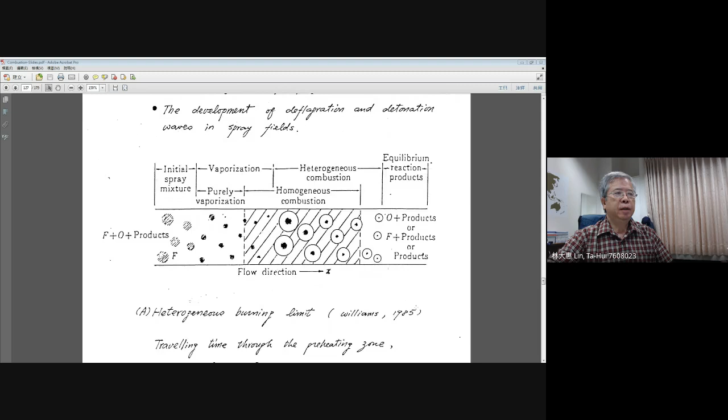Let's look at the modeling on spray premixed flames introduced by Williams in 1985 in the book of F. Williams. And as I described earlier, we consider the spray flame structures like the plot shown in the page of 3.34. Here, they describe the premixture of gasified oxygen and fuel vapor with the fuel droplets.

In these mixtures, actually, they assume the oxidizer is easier to be evaporated as a gas, right? Therefore, from the beginning, they assume oxygen is already provided because of the easier gasification from the injector and also the gasification process in the upstream sites. And that means that we just look at the influence coming from the liquid droplets, okay?

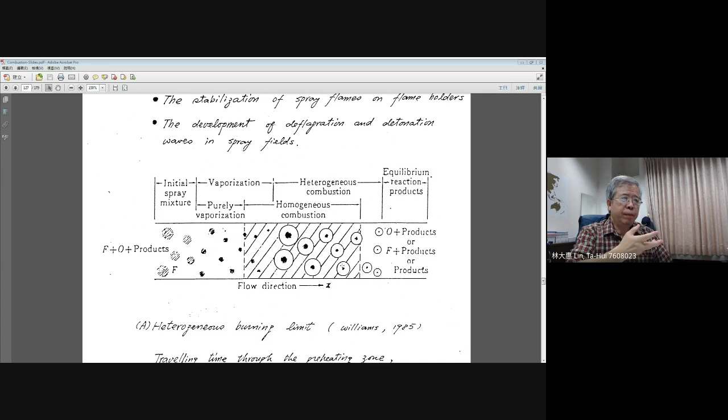This mixture contains the gaseous oxygen and some fuel vapor evaporated earlier in the beginning and also has some liquid droplets, okay? Now, as I described, when this two-phase mixture flows continuously from the left-hand side to the right-hand side, and since we already have some fuel vapor mixed with oxygen, that means that in the gas phase, actually, you already have some mixing of fuel vapor and oxygen.

That will give you a possibility to generate a bulk premixed flame. Actually, this is controlled by the gas phase of oxygen and fuel vapor. Okay, and here you can see that there's a region to let you know there is homogeneous combustion. It's just like a flame sheet of your premixed flame.

Okay, now in the premixture, you still have a certain amount of liquid fuel, right? And that liquid fuel initially in the upstream side, maybe the temperature is not high enough, because you see the temperature profile of the premixed flame in the upstream side. Actually, the temperature is quite low, but when the flow moves closer to the premixed flame front, then the temperature will be increased, which means they will go to the preheating zone.

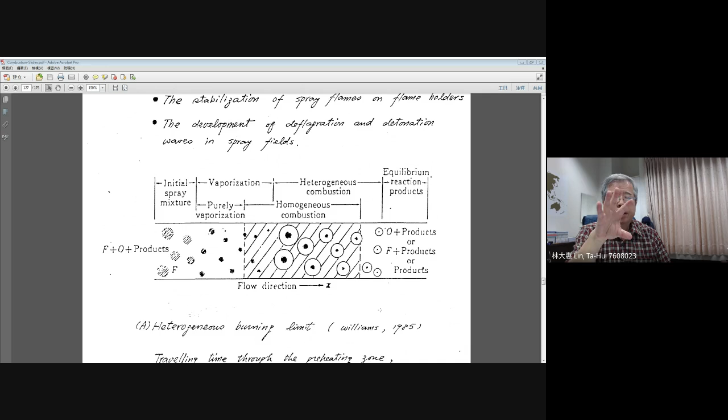Then when the flow flows into the bulk premixed flame, actually they do not have a chance to have a liquid drop, right? But if you have a large droplet, then the droplet lifetime is longer. Then you may have the droplet itself as a liquid inside of the premixed flame. Then you may have so-called heterogeneous burning, because in the gaseous flame, you will have tiny droplet burning inside of the reaction zone.

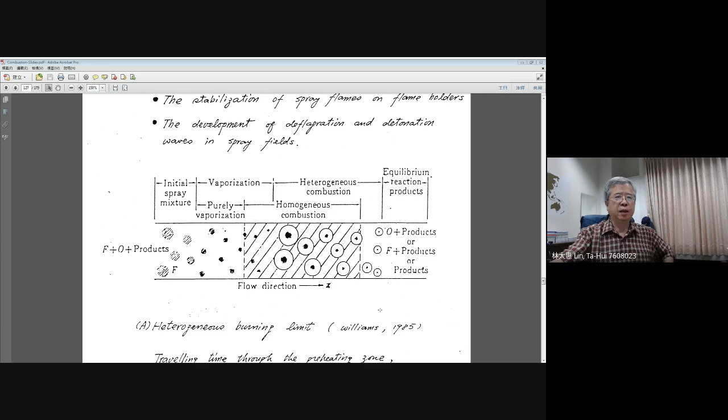Okay. Now the criterion to distinguish between homogeneous burning and heterogeneous burning depends on the traveling of your droplets in the preheating zone. In this traveling process, the droplet can complete evaporation or not. Okay. Now let's look at the two time scales.

The first time scale is the traveling time through the preheating zone, which means how long the droplet will move from the edge of the preheating zone to the premixed flame. Then this traveling time is very important to be compared with how much time this droplet needs to complete evaporation. Okay, then this is the droplet evaporation time.

Okay, now in Williams' book they simply give you some estimation to compare these two time scales. The first time scale, the traveling time through the preheating zone, can be determined by the preheating thickness, the length, divided by the speed, right? Because the flow coming from the upstream side is moving with constant velocity.

That means, as you remember from the previous learning on premixed flames, if you go away from the preheating zone, actually the flame speed is almost the same as the upstream side. We assume the velocity did not change too much. Then you can use your flame speed to be compared with the length.

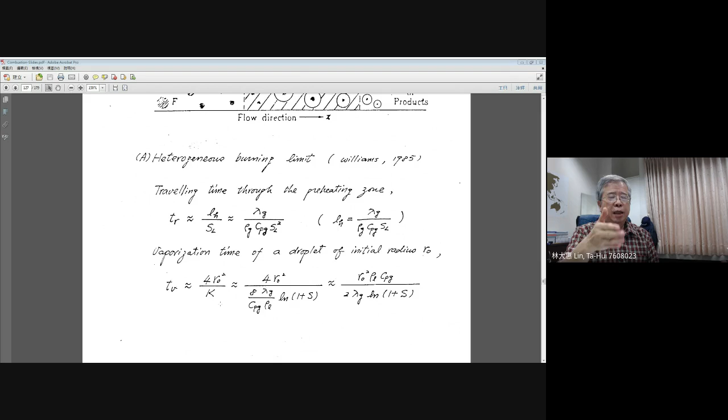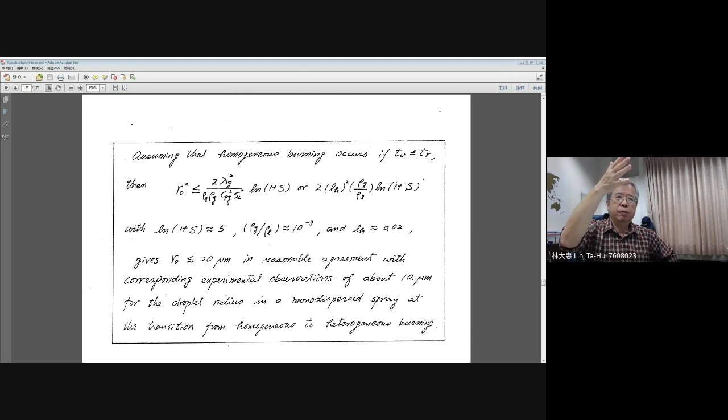Okay, then the criterion simply states that if TV is smaller or equal to TR, then you will assume there is only homogeneous burning, because droplets will complete their evaporation before the premixed flame front. Okay, and put these two equations together, and the threshold for the droplet radius for homogeneous burning will be described by this formula, and you can estimate for the regular hydrocarbon droplets.

Then you will find out the initial droplet smaller or equal to 20 micron is a reasonable threshold for the homogeneous burning of these two-phase mixtures. Use this formula to estimate: if the droplet size is small enough, smaller than 20 micron, then you will assume the burning only has gaseous burning without any droplet existing in the premixed flame region, the chemical reaction region.

Okay, and this estimation is reasonable, agreeing with the corresponding experimental observation of about 10 micron. From the experiment, for droplet size less than 10 micron, you always have complete gasification of the liquid droplet before the premixed flame. Okay, and this is a good estimation for distinguishing between homogeneous and heterogeneous burning.

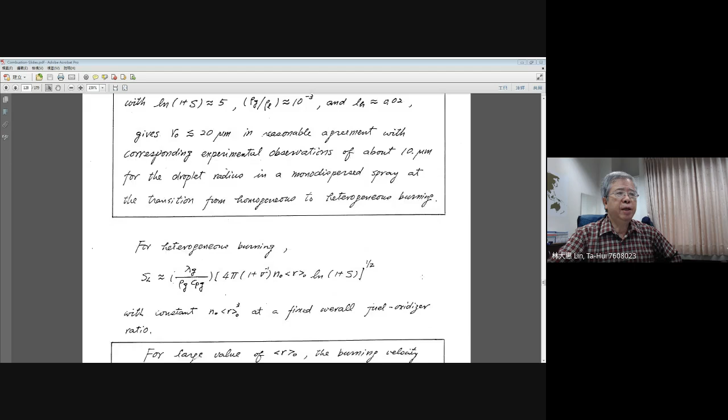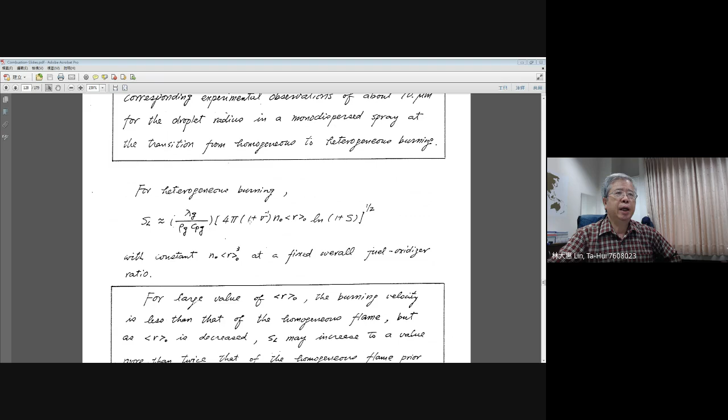Okay, and actually they try to estimate the flame speed for heterogeneous burning, to be compared with the flame speed for homogeneous burning we already described in the section on premixed burning. Then you can figure out there is a dependence on droplet number and droplet radius, N naught and R naught. N naught represents the number of droplets from the beginning; the subscript naught represents the initial condition. And R naught represents the average radius of droplets from the beginning.

Okay. Now, from these equations, we can further discuss, because from the beginning for this two-phase flow, we already control the total liquid amount to be the same, right? It's a fixed overall fuel-oxidizer ratio. That means the amount of fuel is fixed. That means the number times the volume of your droplets will be fixed. This represents the total mass of liquid fixed from the beginning.

If this is a constant, then N naught times R naught will equal 1 divided by R naught square, right? And you will find out this can be replaced by 1 divided by R naught square. R naught square can have a square root. Then you will figure out from the bracket the relation between the flame speed and R naught by inverse proportion. That means the flame speed is inversely proportional to the initial radius of your droplet.

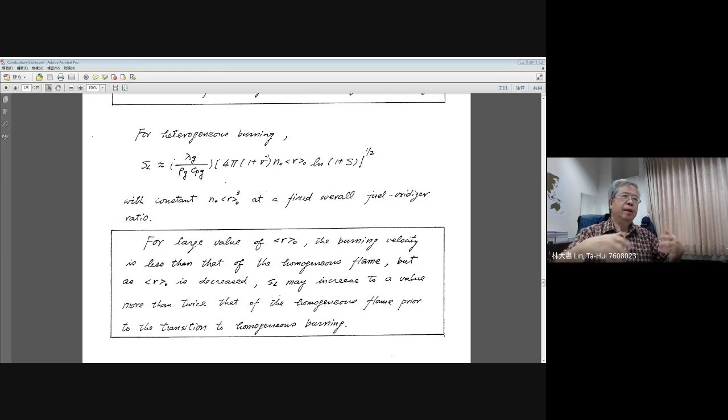And this needs to be justified by further formulation, because this relation does not give you the limit for the flame speed for heterogeneous burning. Think about it. I just explained the flame speed is inversely proportional to the initial radius of the droplet, right? But this relationship tells you if you reduce the initial droplet radius as small as possible, your flame speed may go to infinity. This relation does not give you the exact relation. It just approximately estimates this kind of behavior.

The justification needs to be analyzed based on a detailed study. And a detailed study of this idea was proposed in my master thesis, and the asymptotic analysis was published by myself and Professor Law, my advisor, in 1988. We tried to look at the structures like that. We consider two kinds of burning.

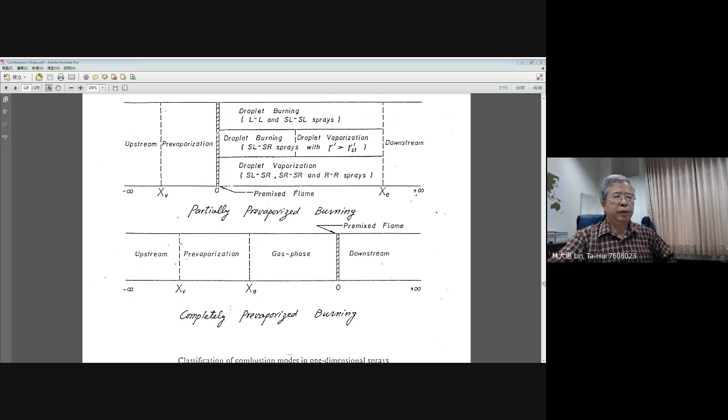The lowest one in this figure is the complete pre-vaporized burning. This mechanism represents all the droplets completely evaporating before they reach the premixed flame. From the upstream side, there is a two-phase flow, as we described earlier: some gaseous oxygen and fuel vapor, and also a certain amount of droplets. They may start pre-vaporization at x equals xv because the temperature reaches the boiling point of the droplet.

And they may finish pre-vaporization before they reach the premixed flame, which means at xe all the droplets finish gasification and disappear. In this region, the fuel and the oxygen are purely gas phase, and this premixed flame can be described by the gaseous premixed flame we already discussed earlier.

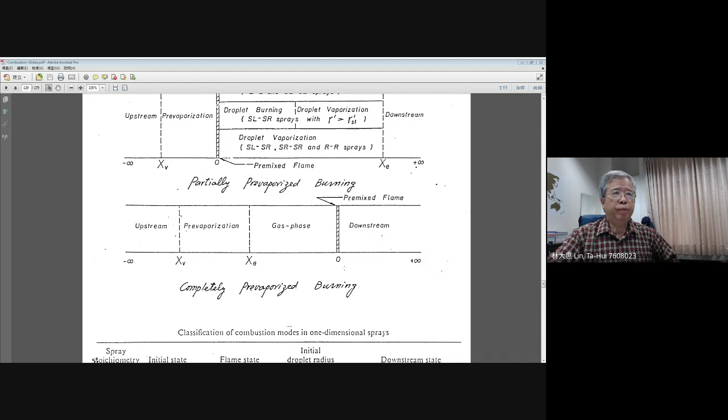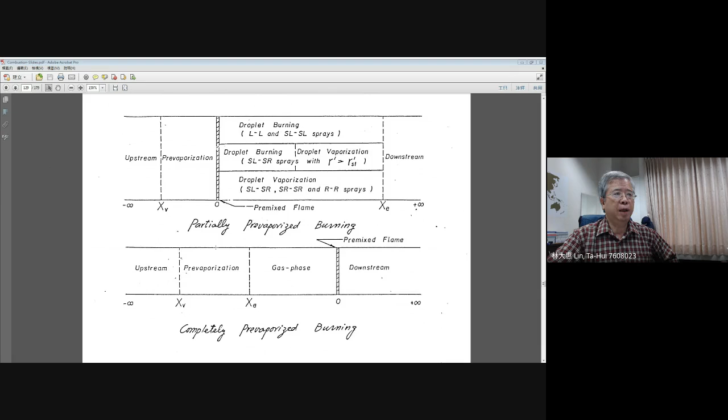But for the so-called partial pre-vaporizing burning, evaporation starts at x equal to xv, very similar to the complete pre-vaporized burning case. But the droplet cannot finish evaporating in the preheating zone of the premixed flame. Then you may have droplets existing downstream, with several possibilities for different kinds of droplet behavior.

For example, for the lean spray, L means the lean spray, you have some oxygen left, right? The droplets still exist in the oxygen environment, and they will burn. But for rich spray, R means rich spray, you do not have oxygen because all the oxygen is consumed completely at the premixed flame. Then there is no oxygen downstream. The droplets can evaporate, but they do not have a chance to burn.

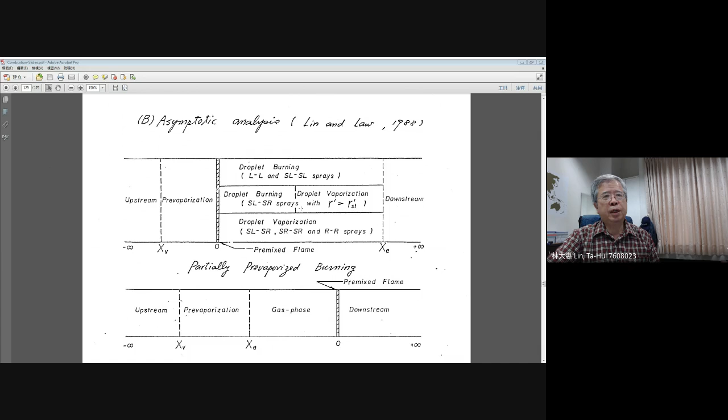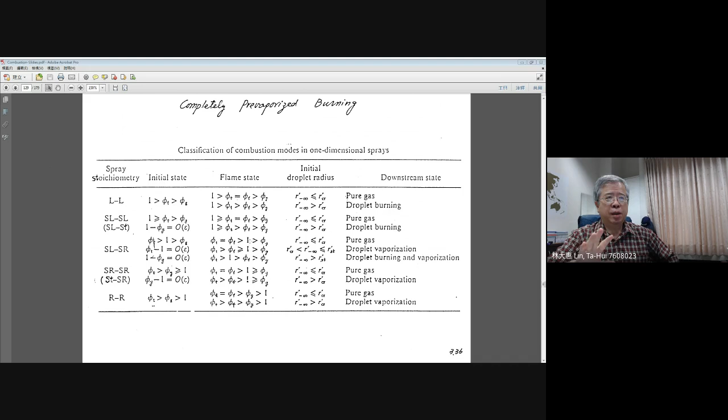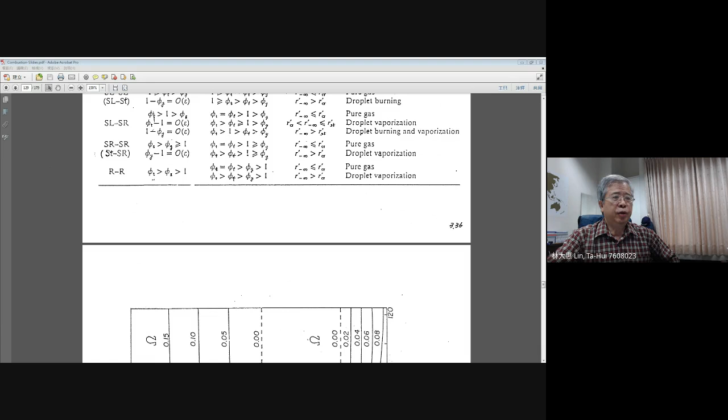Okay, now we shift to the, let me change to the, okay, I think we change the direction of the slides, then we can have some discussion on the results.

Okay, here is a result from the calculation. We consider three different kinds of spray. Phi T means the total equivalence ratio, around 1.15, another one is 2, and the third one is 0.8. 0.8 means overall a lean spray.

Lean spray means we consider the liquid droplets and the fuel vapor together, because some fuel evaporates and becomes vapor, and we count the total fuel compared with the oxygen in this two-phase flow. Overall it is the lean condition described by phi T equal to 0.8. Phi T equal to 2 represents the rich condition. And 1.15 represents a condition very close to the stoichiometric ratio, and this one will give you some surprising results.

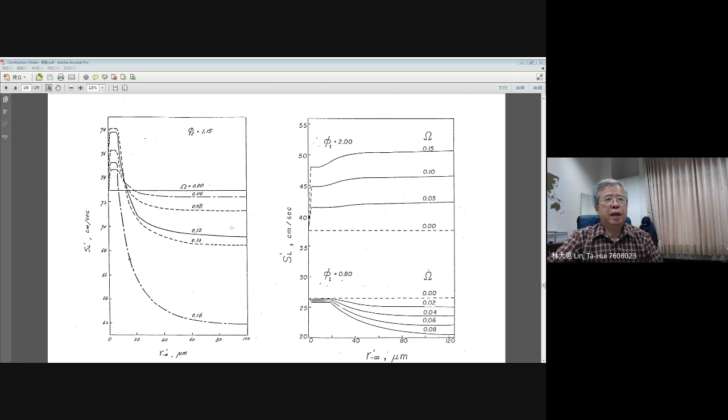This is quite complicated to explain, but just know there is some influence coming from liquid loading and droplet radius. If you are interested in the detailed explanation, you can go to our paper published in 1988. But anyway, I'll give you the final comparison to show the importance of the results.

The left-hand side shows the spray with small droplets, where the droplet radius is around 20 micron, and the right-hand side is 50 micron, the spray with a larger droplet radius. And you can see the flame speed distribution. The homogeneous limit represents the flame velocity corresponding to the gaseous premixed flame.

Now, if you increase the liquid loading, meaning you have more liquid droplets, from 4%, 8%, 12%, and 16%, you can see the flame speed curve shifts to the rich side, and the maximum flame speed increases continuously.

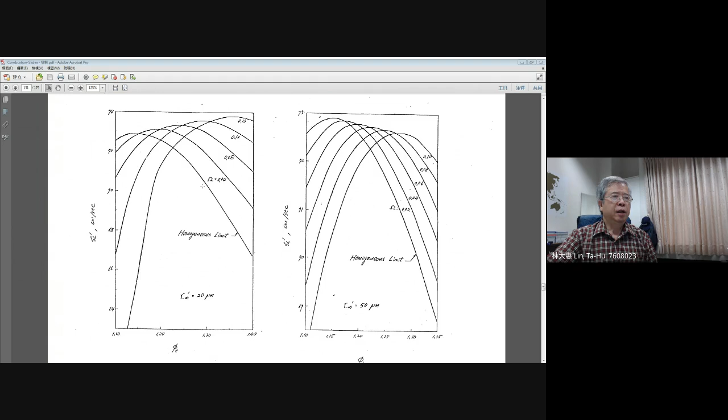Okay, and here you can see, if you look at a given total stoichiometric ratio, as the liquid loading increased, the flame speed increased too. But for the rich spray, the flame speed curve shifts to the rich side, very similar to the shifting of the flame speed curve shown on the left-hand side. But the maximum flame speed basically decreased.

Okay, they are decreased. But in general, when you have a certain amount of liquid existing in these two-phase mixtures, the whole flame speed curve will shift to the rich side. Okay, and these results can be justified by experiments. Okay, let's bring the next page to show you.

I need to make a change. Need to change the orientation of the... Oh no, I'm sorry. I need to use the other slides.

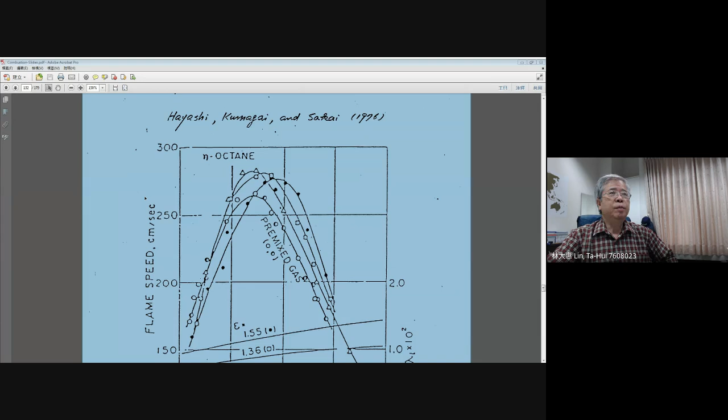Okay, yeah, we do have a comparison here. Let's see. We look at the paper by Hayashi, Kumagai, and Sakai in 1976. They did a very nice experiment. There is the so-called epsilon. Epsilon is the expansion ratio. There is the combustion chamber, and there is a piston moving to expand the volume of your spray. When you do large expansions, you reduce the pressure inside your combustion chamber.

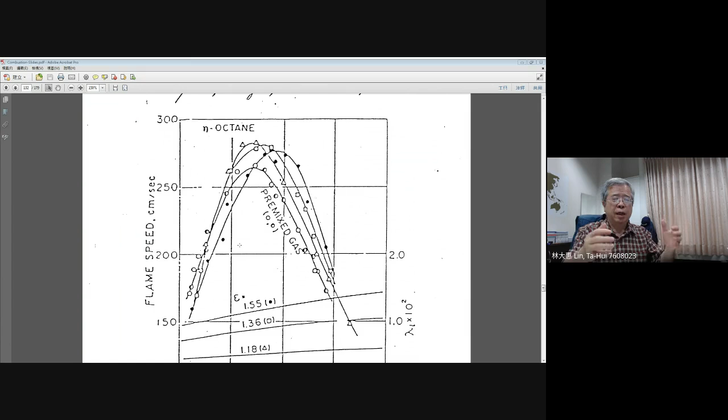Initially, you have certain fuel vapor inside the combustion chamber. When you expand it, the pressure reduces. When the overall pressure reduces, the fuel vapor has a chance to be condensed. Since the total pressure is reduced, they will condense to the liquid phase and be very uniformly distributed. And when they condense, they will nucleate small droplets, right?

Okay. Now here they do different expansion ratios by sudden expansions. The expansion ratio is 1.55, 1.36, 1.18, and with larger expansions you produce more uniform, larger droplets in this combustion chamber. Okay, then they ignite it and try to measure the propagation speed of a spherical flame.

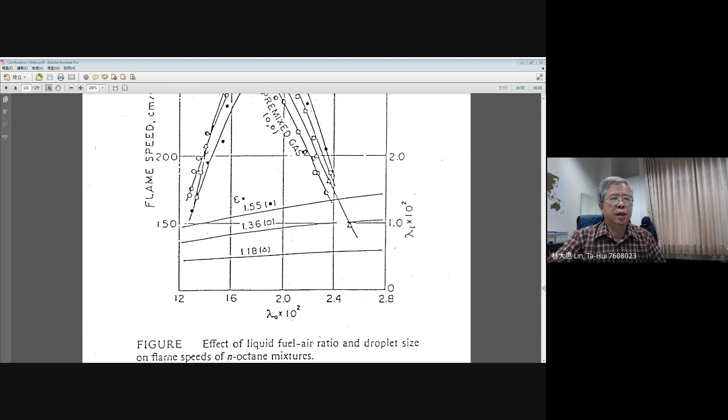Okay, and then the interesting thing is here, lambda. Lambda is the overall equivalence ratio. Okay, or they use the fuel ratio. You can imagine this is equivalent to the equivalence ratio. And the vertical axis represents the flame speed. Okay, and you have a large expansion here.

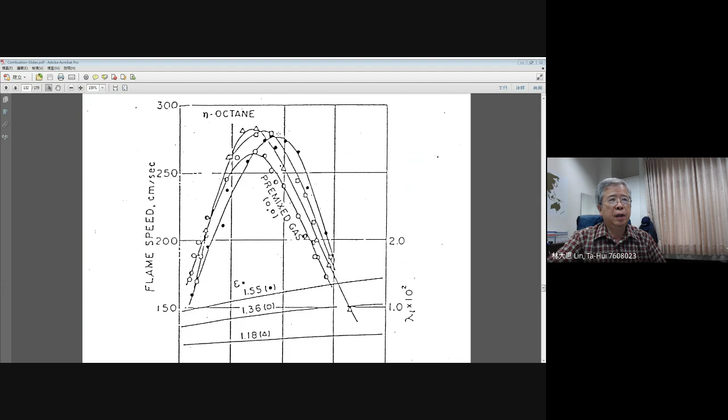There is the solid circle line shown here. This is a flame speed curve, and then the open square, and then the triangle, and the open circle represents the premixed gas. Premixed gas inside the combustion chamber does not have liquid. Okay, and this result can be perfectly compared with our theoretical prediction.

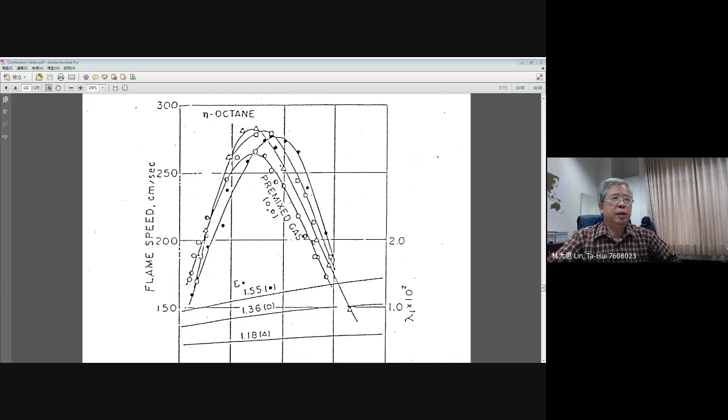They tell you if you increase the amount of liquid fuel from 1.18 to 1.36, 1.55 by epsilon, that means you increase the liquid fuel loading, the flame speed curve shifts to the rich side. Okay, and you can see the maximum flame speed actually reduced a little bit, but they are higher than the maximum flame speed for the premixed flame. And the whole structure of the flame speed variation with the liquid fuel loading is quite similar to that predicted by the asymptotic theory.

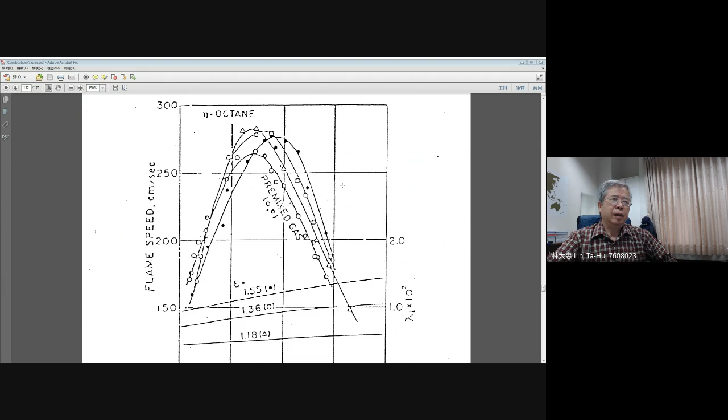Okay, and up to now, we try to emphasize modeling of spray premixed burning, but those kinds of behavior tell us the bulk burning involves heterogeneous burning and also homogeneous burning. Those burning structures are not easy to describe, but they tell you there is some optimal burning situation based on the droplet radius and the amount of liquid loading you may have.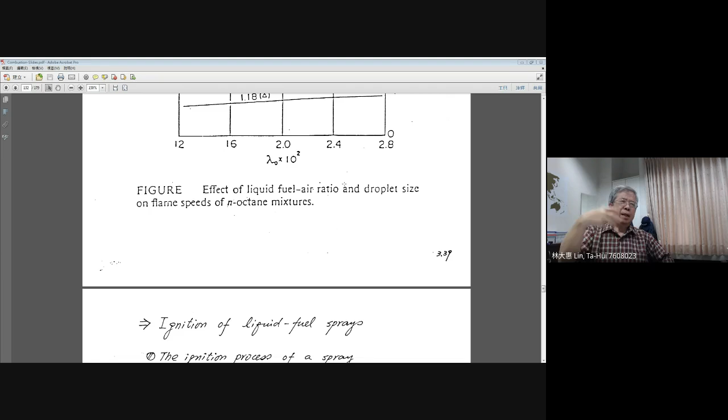Okay, and you try to link the evaporation process for the liquid droplets and think about how much fuel vapor can contribute to the overall bulk burning. That balance will give you some idea to optimize the burning intensity. Okay, but it is very hard to explain in detail for spray premixed flames.

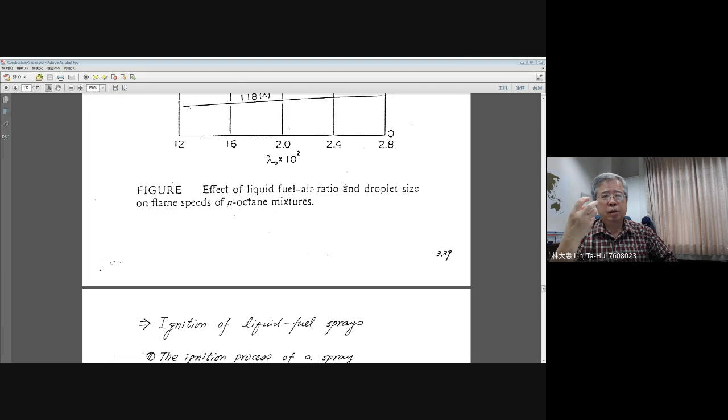But I just try to give you the idea that for spray burning, the interaction between the liquid phase and the gaseous phase is quite important, and the contribution coming from the droplets is an important part, and it depends on how many droplets, the droplet size, and also the amount of the liquid loading. Okay, the fuel loading.